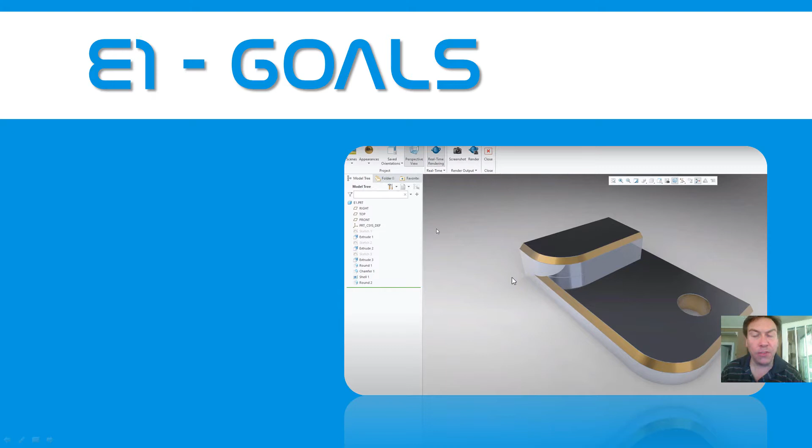Now it's like a plastic enclosure. It's actually hollowed out. You can't really see it from the angle that that's at, but you can also see it's in the interface of Creo. And this is what they call a photorealistic rendering. So it actually has some enhancement digitally to it.

All right, first of all, we're going to talk about the interface once we get into Creo. And the interface, again, that's like what you see here. This is the model tree, and then this is the ribbon up at the top, things like that. Then we're going to talk about settings. Now, settings, there's actually a couple areas in Creo where you can set things up, like what color do you want items to be? What units do you want? Do you want metric? Do you want English, or imperial, as it's sometimes known?

Then we're going to take a look at sketching. So the way you start modeling a part is you actually draw a two-dimensional profile of it, like you see here. And you can see it's a rectangle, and then you put in the dimensions. There you can see the width, and then you can see the height. And we'll even talk about this. Notice that little parentheses and weak. Remember that, because we're going to talk about what that is and what that does.

But we will sketch this in two-dimensional space, and then we get into 3D modeling from that profile. We can extrude it out and actually see there it's making a 3D model. You see the little pink arrow there in the middle, and then we can specify right there. You see it's set to 0.5, so that would be a ½ inch. So that's the goal for that.

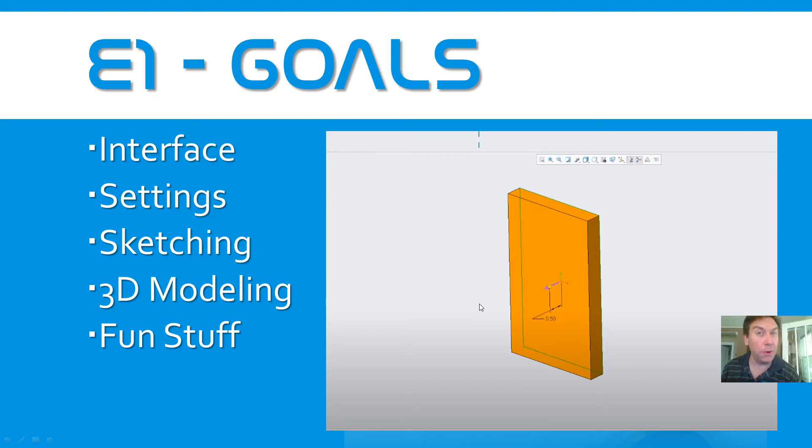Now we're going to have a little fun with this. Typically in the training guide, and I'll show you where that's all at in just a moment. Those of you in D2L have access to it. Those of you who might not have access to D2L at the present time, I'll actually show you where you could get it on the web as well. So we'll do some fun stuff. We're going to do that photorealistic rendering where we actually make it look really sharp. Okay, and I hope you find that interesting.

And then there's 2 labs. Now with every exercise, there's labs that go with it. Sometimes there's 2, sometimes there's 1. And usually it's how long is it going to take you. So if they're easy ones, I'll usually give you 2. If it's a very difficult lab, I give you 1, and those you typically want to do on your own.

Now be aware that this first exercise, I actually show you how to do it, but when you do the labs, those are what you're supposed to be doing on your own. You're going to be a much better designer using the software if you do those on your own and try them. And then you could go back and watch the video. You can pause the video once we're done with exercise 1, model these 2 things up, they're in the training guide, and then see how I did it. And you're going to learn so much. Before you know it, you'll be exceptional at this software.

And that's the goal. All right, and so these are what the labs look like. This is lab 1 and lab 1B. So when it comes to the nomenclature, exercise 1 is always going to be known as E1.

And then the labs that coincide with whatever exercise it is, exercises are kind of like the chapter, you might say, will carry the, like, instead of E1, it'll be L1 for lab 1. Or L1B for lab 1B. And so when we get to exercise 2, you'll have lab 2, and exercise 3 will have lab 3 as well. And I don't give you videos for all of the labs, be aware, because that's what you're supposed to be practicing on your own. And so that's going to make you a better designer.

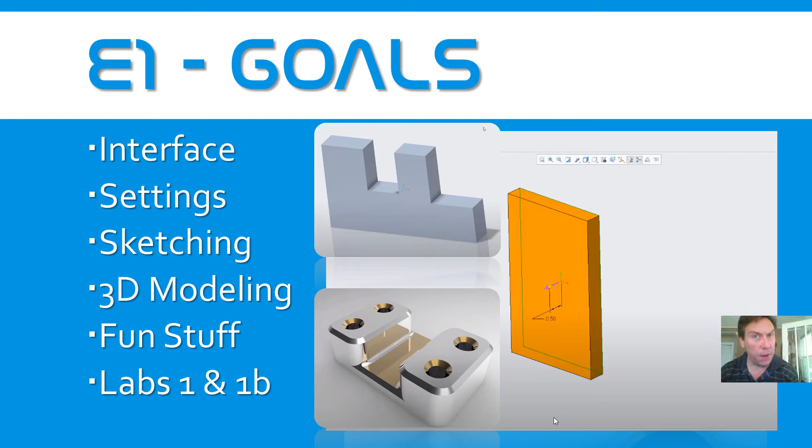And ultimately, this is what our goal today is, to finish these 3 models. And so every week, if you're in a 16-week course of this, you're going to have to model these up. And again, I give you the videos typically, especially if we're doing it online. Those of you who are in my class will actually do the exercise together, and the labs, you need to do those on your own.

Okay, so let's begin. I started up Creo earlier. There's a little video, especially in D2L, on how you could download the software. Even if you're not in my class, if you're just watching this on YouTube, you could just Google Creo Student. It depends on where you're going to school. Sometimes they have a licensing agreement. I don't know exactly whether your school will let you download it or not. But where I teach, all my students have access to it. Just make sure you use your student email address when you register, and you have to make a password.

Okay, so here we can see the interface, and that was the first thing we said we wanted to talk about. Now this is what we call the ribbon up at the top here, and the ribbon is a generic name. Those of you who might have taken a Microsoft Office class, they always call that the ribbon, the icons up at the top. Now on the left-hand side here, you have the model tree and folder browser and favorites. What we really focus on in this class is primarily the model tree, and that's going to contain a roadmap of everything you do when you model something up. And we'll see that in action.

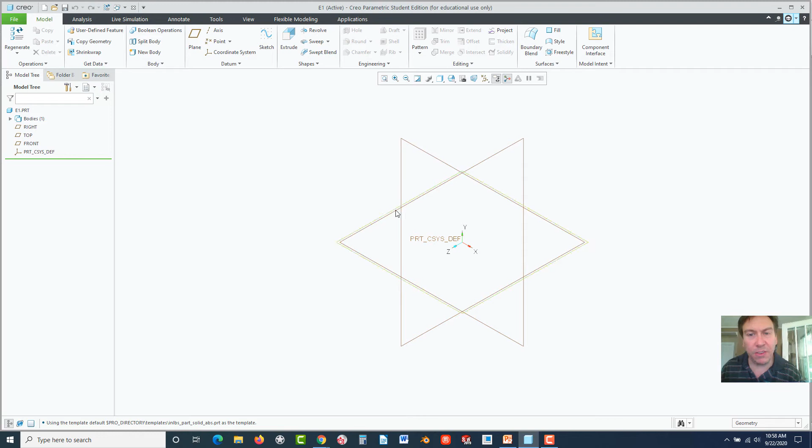But now we can see we have these, what they're called planes. And look over here in the model tree, you have right, top, and front. And as you click on them, they highlight in green. And those are your paper that you're going to sketch on. So when we're drawing that sketch of that rectangle, we select one of those views and we do it. And we have to just figure out, though, is that the front view we're drawing, the right view, or the top.

But as we go further into modeling over the course of the next few weeks, we'll focus more on that. But right now, I need you to focus just on sketching, and then later on you can give more thought, and we'll just have discussions about, like, should I draw this on the right, top, or front? I'll be honest, it really doesn't matter that much for the parts we're doing right now.

And in the industry, once you start using this and you have spatial awareness, it kind of starts to make sense. But the first day, it's a little much to talk about. So we're just going to go ahead and note for the next 4 weeks, we're going to sketch always on the front plane when we start off.

Okay, so what you do, you click on that front plane. Now notice right below it, there is a CSYS. That's a coordinate system. That's the actual world coordinate. That's the 0, 0, 0 for X, Y, and Z. Now, do you have to really know and understand X, Y, and Z? No, that's the beauty about this software.

It's a granddaddy of softwares when it comes to computer-aided design. And most of the companies have mimicked this technique. Creo was like the grandfather of this. And X, Y, and Z Cartesian coordinate modeling, which was the early 80s, was very much more difficult than what we're doing here. This whole concept of using planes to sketch on and then extruding is, in my opinion, very easy. It's understandable. So anyhow, all three of those planes intersect each other at that origin.

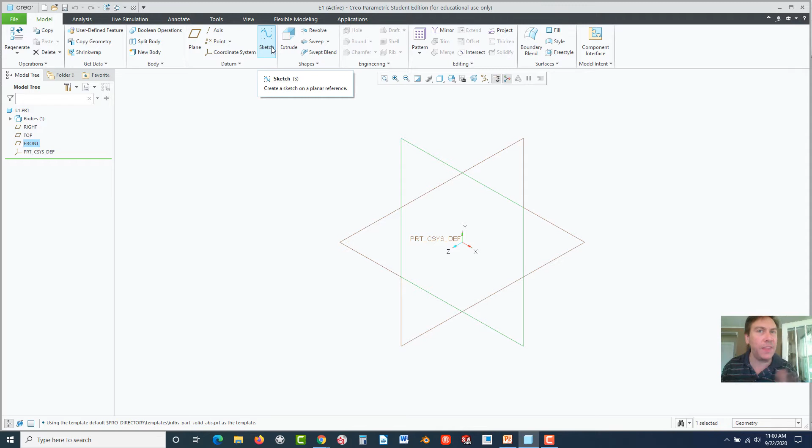We're going to start off using a method which I think is probably easiest for most people to understand. And that's starting a sketch on the plane versus going to a feature initially. As you get better at it though, picking a feature first might be a more plausible option, even more efficient option. And we'll have a discussion about that later, not today. But let's go with Sketch.

Now, once we select Sketch, you'll see your plane orients itself automatically. And that was that checkbox I said. It was one of my favorite checkboxes where it automatically orients the plane parallel to your screen. So we're sketching here, and these are the planes. Now, those aren't boundaries, by the way. It's infinite. However big you make this, you can make it that way.

So what we're going to do is go to the rectangle tool. Find rectangle up here and click. Now move your pointer over the origin, which is CSYS there. You'll get a little blue dot. When you get that blue dot, click. Now drag to the upper right. Now try and stay away.

Look at this. If I don't click yet, if I get that little equal symbol, stay away from those. They're great sometimes, and in this case, if it's not going to be equally square, it's not good for us. I mean, they're easy. You could just click on them and delete them if you accidentally get them. But they're automatic relations that are established, and we just want to avoid that. So click to the upper right, make a small little box like that.

Now here's the thing with Creo. When it comes to your mouse buttons, the left mouse button is what we're going to use 90% of the time. That's what I'm using to sketch with, and I'll always just refer to it as click because that's what we use all the time.

All right, so that's the left. When I made that, I just click, left mouse button. I'll very rarely say left mouse button after today's class, by the way. But the right mouse button allows you to select, and menus will pop up.

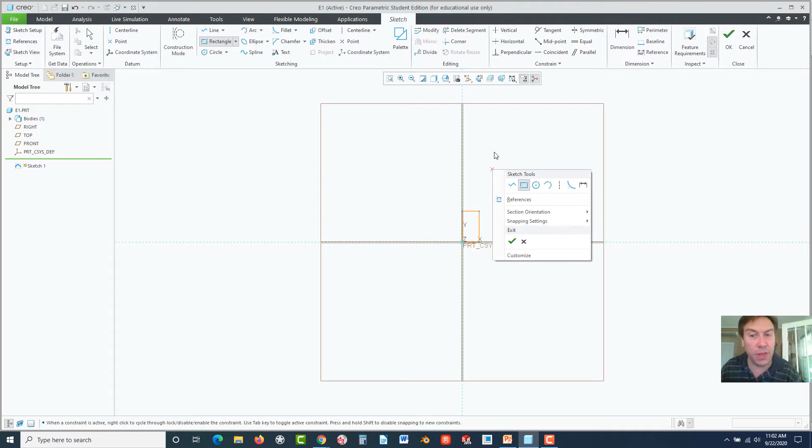Now, when you right click with Creo, it's interesting—it's a little different than some Windows programs where you automatically get the pull-down menu instantly. Creo sometimes isn't instantaneous; you have to hold it down for about a second, a little over. Just be aware it takes a minute if you ever do that. But I'm going to hit escape, and escape gets me out of that tool.

Now, if you really want the dimensions to appear once you've drawn something, believe it or not, that middle wheel will zoom in and out. If you scroll, that's easy, but believe it or not, it's actually a button too. Not everyone knows that. If you push it down and hold it like a button, it'll do certain things. What it does in Creo, it actually acts as an escape key sometimes. So go ahead and watch this on that mouse button.

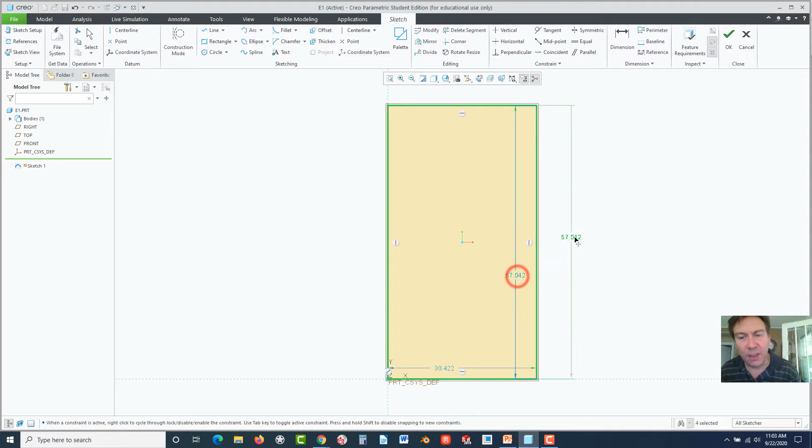Click, and look at what it just did. Now you could go up here to zoom to fit refit, and it'll zoom up for us. Now we can actually see—if you middle click again, you can grab these dimensions and drag them out. Now we have a rectangle, but as you can see, it's very large.

The actual dimensions that we want are located in the book. And those of you taking my class, there's a video before this that shows you how to utilize this. If you missed it, now is the time to watch and pay attention.

So I'm going to middle click on Chrome here, and I want you to type in vertanux1. Now, if you have D2L, you could get all this from D2L—you don't need to do this. But if you're not on D2L, go to this web page for vertanux1.

I made this page for my students as an alternative to D2L so they can access things. And also—

So for example, if you go to instructional manuals here and you're in Creo Parametric, now it says 6.0—that's because I haven't updated the manual yet. There's not a huge amount of changes I need to make, but I'll get it up there eventually. You'll see Creo Parametric 7.0 soon, but 7.0 just came out literally like a week ago, so I haven't had a chance to update my training guide.

But if you click on that, you can see the training guide for the course. It's in PDF, and here it is. You can see this is 6.0.

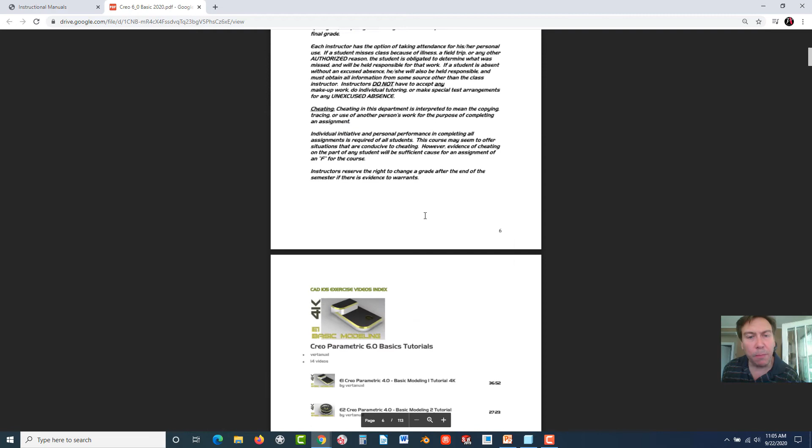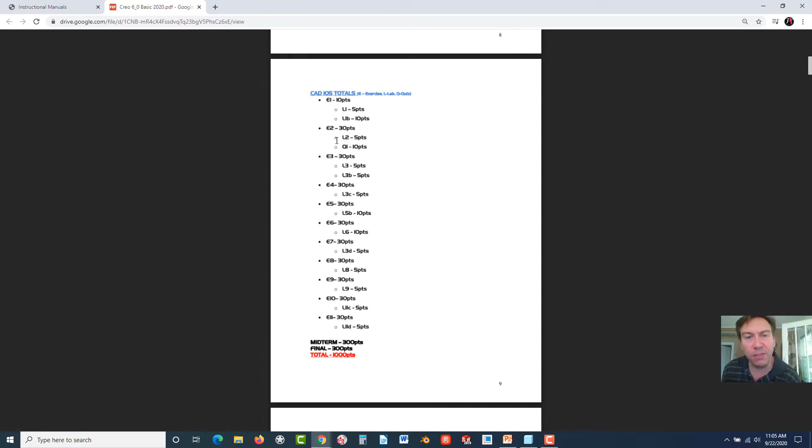All right, but this has everything you need, and even the point totals—look at that, there's E1, L1, L1B. E1 today is worth 10 points, L1 is 5 points, L1B is 10 points, and so on and so forth. So you could understand immediately where you are and what you need.

And again, the grade book on D2L has those all on there, so you could always check your grades once you send me those exercises in the labs. And remember, always send them to me as PDF.

Okay, so here we have the interface—we're just discussing this, so really this is just a rehash of what I'm going over. We talked about the interface: the origin, the model tree, the viewport, and the mouse buttons, which we just discussed.

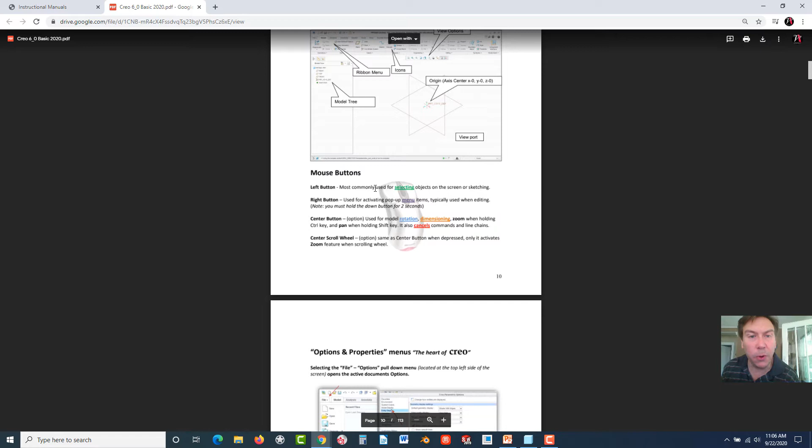There it is. Now the options menus, talks about that too. A little bit out of order I went, but that's okay. This is all here. It tells you how to start a sketch and talks a little bit about more details, some other things that we're going to talk about as we go through.

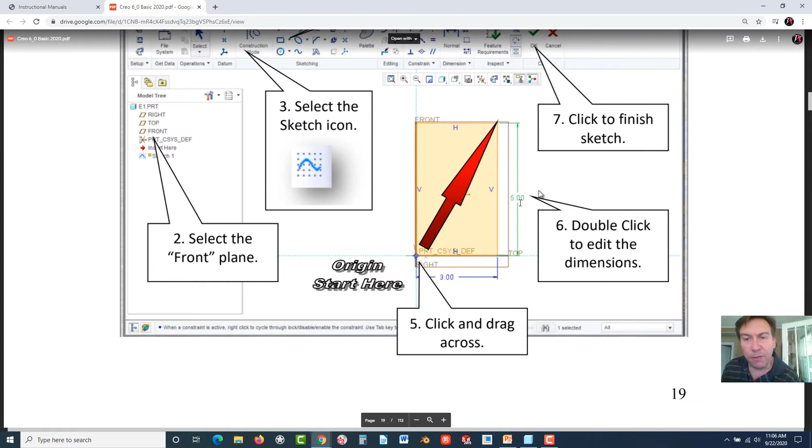But you finally get to exercise 1, and here it is. This is where you can see the actual parameters that you have to use. So if I zoom up here, you can see we're going to go ahead, and we've just gone through this whole series of steps, but 5 by 3 is what we're going to do.

Now I'm not going to use the guide to it because I have it in memory. I wrote this guide, so I don't need to use it all the time, but this will help you. If you'd like, print it out. It's free to print out, free for anyone to print out. So let's go back here. That's where I'm getting those dimensions and parameters from, or you could just watch this video, of course.

So double click on this dimension down here. Now there are 2 forms of constraints inside Creo. One is dimensional constraints. So like we want this to be 3 inches wide. Now notice that when I double click, there's up to 12 decimal places to deal with there.

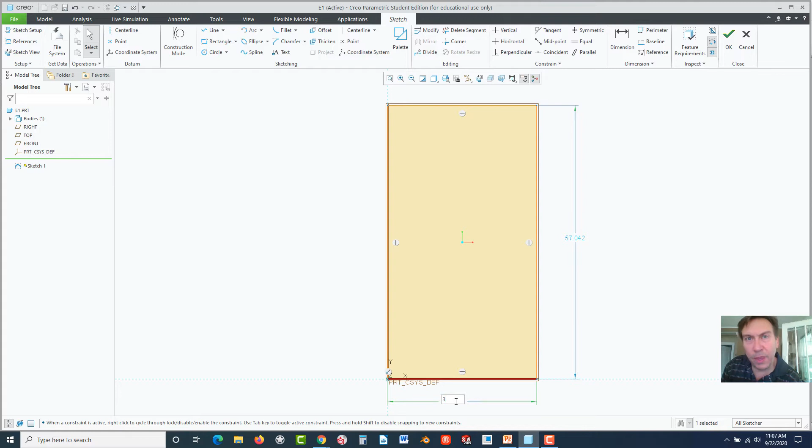Now, if you want to look professional, don't backspace on it or type in 3.0000 whatever. Just type 3 and hit enter. Because it was 3.0, it will know to fill in the zeros. And you can see right there, now it shrunk down a little bit.

Now let's get this one. Double click on this dimension. Type in 5. Hit enter. And now you could hit refit right up here. Now, next week I'm going to show you how to make a fast key for refit, like where you could just hit R and it will automatically do that.

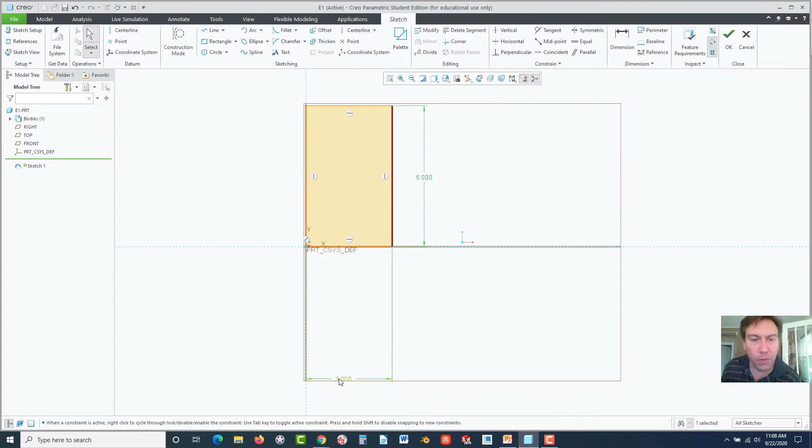But I don't want to go into that. That's a little bit more detailed today than I want to go into. But just note, reason to watch exercise 2 because I'll go through that with you. All right, I'm going to squeeze these in a little bit. I could hit refit again. So now we have these dimensions, and I'll tell you what, we can actually hide those planes.

You don't want to delete them, but click on the planes here, or this button right up here, and turn off select all. And it's going to clean up the screen a little bit. One reason I want to clean it up is so I can discuss these little things.

So this is the second layer of constraints that you have. Constraints can be automatically added or manually added. Like when we drew that out, that rectangle tool automatically added horizontal, vertical, horizontal, and vertical, and coincident, it locked into the origin. That's our anchor point. It's always good, my recommendation is to always lock in your geometry into the origin.

That's another reason why that 0, 0, 0 marker in space is there. It's an anchor point. If you just float it out, it still works. You can still do it, but just be aware that can be a little confusing.

All right, now if you didn't want this horizontal constraint, you just click on it and hit delete on your keyboard. Now, notice it puts a dimension, and watch what I could do from here. I could drag that down. So it removed the horizontal constraint. So be aware, if you add those, you could remove them.

Now you could re-add them, or you could hit undo. So there's an undo button up here. Now just remember, I have students panic and they hit undo several times. And there is a redo button right next to it, but sometimes I've seen where they've gone too far and it doesn't redo enough.

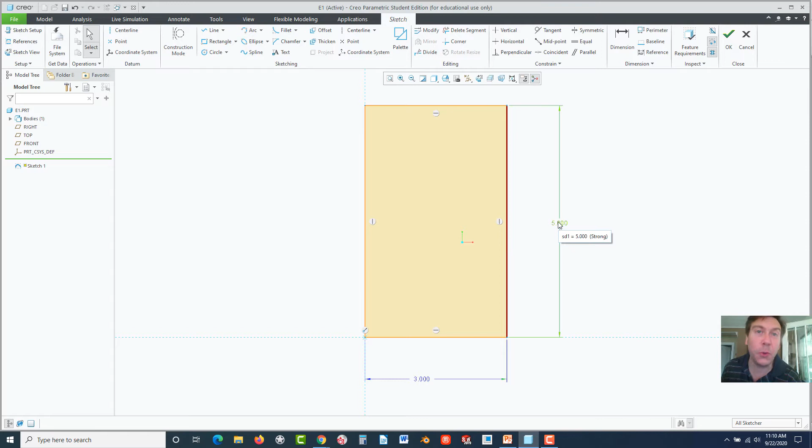Notice that dimension disappeared too. Weak dimensions disappear, but strong dimensions, like when we double clicked on this one, remain. Let me middle click twice to get out of that. Now as I hover over this, you can see in parentheses it says strong. So whenever you change a dimension, it strengthens it, and it won't automatically be deleted if you add another constraint. In fact, there will be a conflict because those are both strong entities. We'll discuss that another time.

But now that we have this, let's go ahead and hit OK. Before you 3D model it, you have to hit OK. Now we could go to extrude.

Now, you might not see it, like, okay, it just shaded it. But here's where I'm going to teach you how to rotate. That wheel does a lot of different things, and you could see in the training guide it had a whole list of things it does. You could go back and read that if you like.

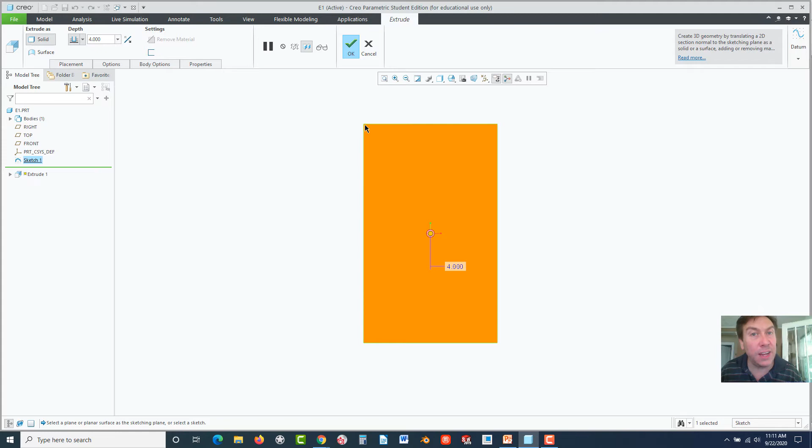If you push it down, actually let's first scroll it. Scroll in and out. Oh, there we go, and it's zoom. Notice when you're using that zoom, you could scroll in and out on certain areas. Like, get your pointer in this upper left corner and use the scroll to zoom up to that region by keeping your pointer focused on that area. Now go ahead and hit refit again.

Now, to rotate, hold that middle wheel down like it's a button. Push it, now hold, don't let it go. Move your mouse left, right, up and down. That's dynamic rotation. Play with it for a while. If you want, go ahead and pause the video and give that a try, because it's so important to be able to articulate or rotate and look at the models that you're working on. Give it a couple minutes. I usually say in class, hey guys, tinker with it a little bit. Okay, so anyhow, you can see that.

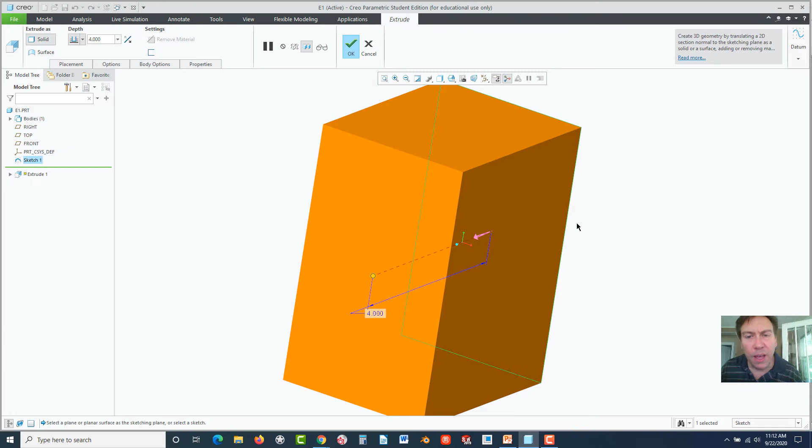Now here is our extrusion. So we have the ability to grab that little point there and drag it back. Now this little arrow, go ahead and click on it. It flips it backwards or forward. We want it forward towards us, so just leave it like that. And we actually want to double click in here and type in a value. You can type in 0.5.

Now notice I'm not using the ribbon up here. Why not? Well, I just didn't feel like it. You could go over here and make sure it's always solid. Not until the advanced class will we ever do a surface. If you ever get a surface, that's an indicator that you have a sloppy sketch. You might have a gap between the lines or something, and so it can't create a watertight boundary condition, so it couldn't extrude it. So just be aware of that.

But anyhow, you can see right here I could have typed in 0.5 as well, and it does it. Now here's the flip switch, just like that pink one, which will flip it to forward or backwards. Notice that you have a remove material option, but it's grayed out. That's what they call the object action paradigm, and it grays out things that you're not capable of doing. The reason is because to remove material, you'd have to have a solid volume to remove from, which we don't have because it's our first feature.

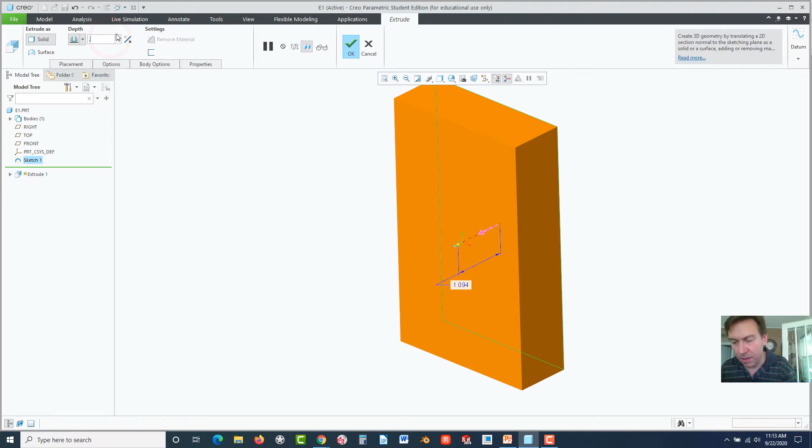All right, let's go ahead and make sure it's 0.5. Hit enter and hit the green check. You could hit refit, but also take a look over here. You have display style, hit that little arrow.

You have shaded with reflections. Now, if you don't get this, it might be because you don't have a professional graphics card, so don't feel bad if you don't have that. Go to shading with edges, click off of it, and you can see the edges there. You could go to shading, no hidden lines, so it's like a wireframe type of deal. That and all these are going to benefit you sometime or another.

But let's go back with shading with edges, that's my favorite. All right, now there's also this one right here, saved orientations. Hit that, you'll see you could go to front, back, top.

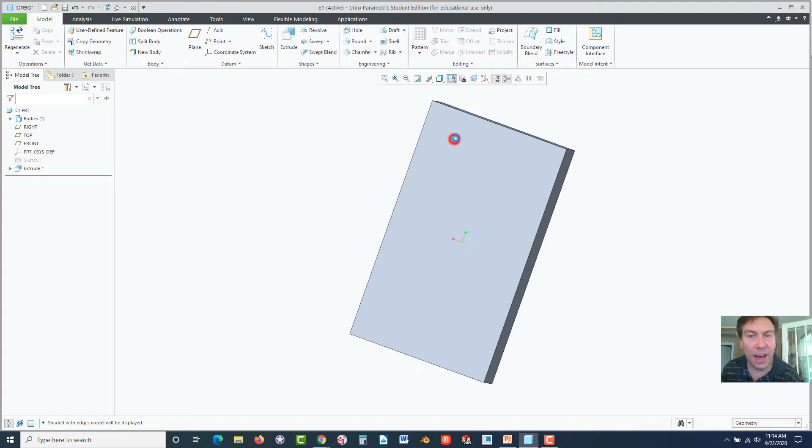Go to standard, and remember we set our standard up as isometric in the options menu. There were other options in there as well, like trimetric, and I think there's even dimetric, and you can make customized ones too. There's also perspective, which gives you a vanishing point.

We'll use perspective later when we want to make a photorealistic rendering to make it look realistic. Turn that off though, since it's difficult to work in that mode for some people, so I'd leave it off. There's also refresh screen, which we don't need right now, and rendering options like this. Leave those off too.

Then there's zoom in and zoom out. If you click on that, you can click and drag a fence around an area, click again, and it zooms up to that region. Same with that one. So you can see there's a number of options, but we're not going to go through them all right now. Here's our first solid model.

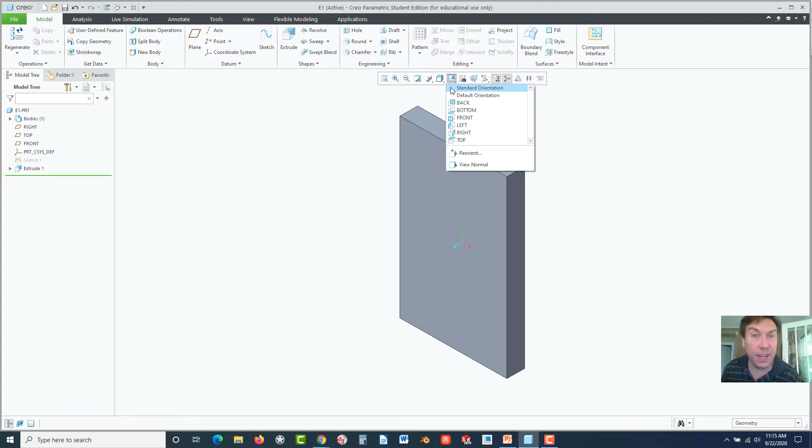Make sure you're in isometric. Again, standard orientation up here will bring you that. Default orientation is the same right now, though you could set them differently if you want. I'm not going to do that right now.

Now let's select this face. Remember we sketched on the front plane last time. Now we're going to build a block at the bottom using another corner rectangle, and we'll extrude it out a half inch. It's only going to be 1.5 inches high off the base edge, and it's going to lock into the left and right edges of the model. So let's do that. Go to Sketch.

Now can we go up here? Absolutely, select it, either one is fine. Find rectangle. If you hit the little arrow to the right of rectangle, there's corner rectangle, slanted, center rectangle, and parallelogram. Center rectangle is a little hint for the last lab today's video, I'll show you how to use that. We usually don't cover it until next week, but it's a really nice tool. We're going to go with corner rectangle for now.

Now move your pointer to the lower left corner and let it snap in there. When you get the blue dot, click and drag this to the right. When you hover over the right edge, it highlights green in my case, and you can actually see a midpoint there. Don't click on the midpoint, just hover over it and you'll see it snap to it. We don't want it at the midpoint today, but in Lab 1B you may use that.

When you get on this edge, just click and then middle click. Remember, you middle click the wheel, and that brings up the dimension. Actually, middle click two times and it gets you out of whatever tool, kind of like hitting escape. You can hit escape on your keyboard too, but I really like that middle wheel.

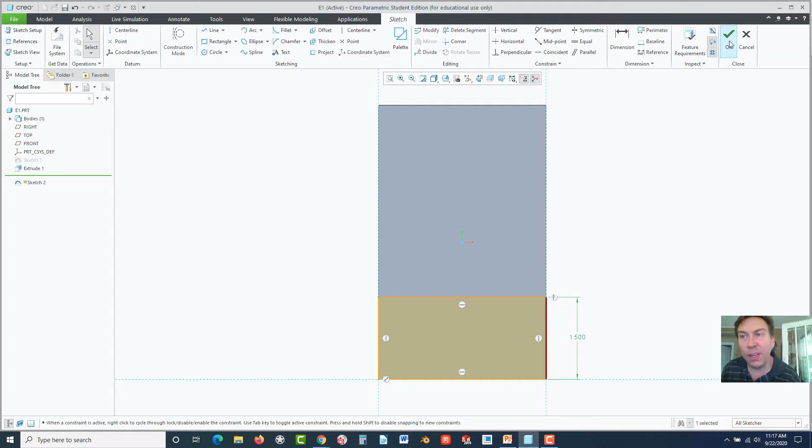Now we could go to OK, go to extrude, and rotate this so you can see it. Remember rotate, which button? The wheel. You hold it down and then move your mouse left or right. Okay, so we've done that. Or remember, you could also go up here and go to standard orientation.

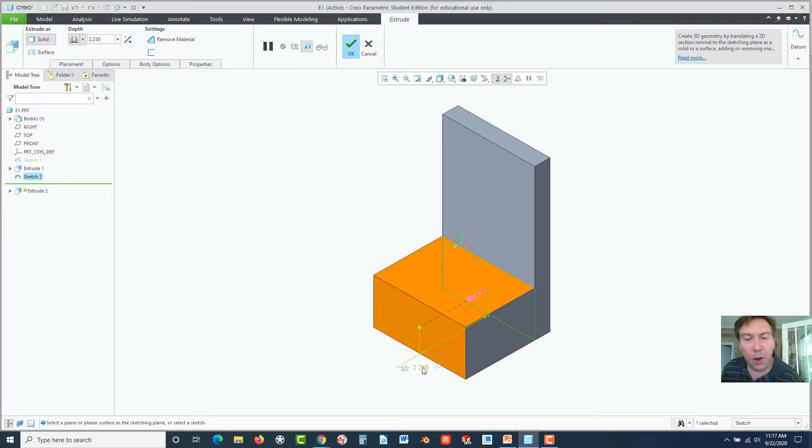This one we said we were going to make 0.5. So you could double click in here, type in 0.5, hit enter. You could hit enter again or hit OK, either one. Now it merged the two bodies.

Now we're going to learn how to put a hole in it. Creo has a wonderful hole wizard, as I call it, with counterbores, countersinks, and things like that. We're just going to learn how to do a hole that we draw in with a profile and cut it through for today. We'll use the hole wizard for exercise 4, so it won't be for a while.

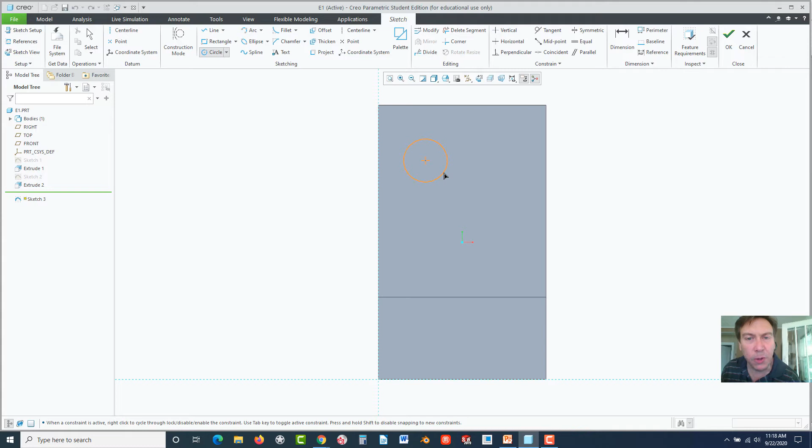But select this face and go to Sketch. Now go to circle. If you hit the little arrow next to circle, you'll see there's center and point, concentric, 3 point, and 3 tangent. We're just going to use center and point. Now in this upper left quadrant, click and drag out a circle, just like I have. Take careful note what I'm doing. Click, and then middle click two times. Remember the middle wheel?

Okay, now you'll see some dimensions. Let's drag them out here and move them into a position where we could easily read them. Now they're all weak dimensions. Okay, now this one should be 0.75. So let's double click on that, 0.75. Now this one, we want that one. Double click on that. That's going to be 1 inch. So it's 1 inch off of the left edge.

Now this one, we actually want it 1 inch off the top edge, not off the bottom. So you don't have to follow what they give you. That's a weak dimension. We'll override it with our own dimension. So go ahead and select the dimension tool here. It's our first time using the dimension tool. Now, select the top edge that we want to reference from one time. Select the center point, not the outer edge, the center point. See that little cross in the center here of the circle. Move your pointer over here.

Now, this is the funny one because no other CAD system I've ever seen does it this way. Now, remember, Creo is a granddaddy of 3D CAD software. So they do things differently because no one had a way of doing these things back then. They had to be creative and think of ways to do it. Most of you from other CAD systems, if you've used them, would know that you would just click, which in this class means left.

If you try that right here, because you want to drop it there, nothing happens. And you'll say, wow, that's weird, because almost every CAD system out there does it with the left mouse button. Not Creo. Remember, Creo is the granddaddy. There were no rules when they wrote this. Instead, it's the middle wheel, the middle button. You just have to click once. But hover where you want it, like right here, middle click, and type in 1.

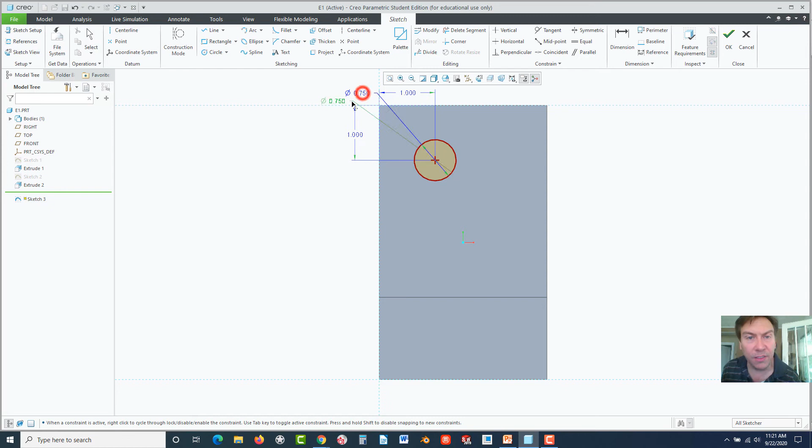See, look at that. I try not to have anything overlapping, and they're laid out in such a way that someone could read it easily. And that's the goal of a drawing. Okay, let's go ahead and hit OK. All right, now go to extrude. Rotate with your wheel again. Remember the middle wheel, hold it down, and you can see it's extruding. Now, we want to flip that. Hit that little arrow so it flips it in.

Now, look at that, the object action paradigm. Now, believe it or not, that's what they used to call it in the 90s. And it was a technology NASA developed. And it's kind of a predecessor to what we now call AI. Does anyone know what AI stands for? Artificial intelligence. Remember how remove material wasn't available before? Now it is, because we have a volume to subtract from. And so it doesn't let you pick things that you can't use.

So it's just like having a little robot next to you with your toolbox. And if you're grabbing a hammer to put in a screw, it's not going to give you a hammer because it knows you can't use it, or you shouldn't use a hammer to put a screw in. It's going to give you a screwdriver. And so that's what Creo is doing right here. So it's kind of a form of AI or expert system.

All right, so anyhow, remove material automatically selected. If not, sometimes it's not always smart enough. It depends upon how you model. I've seen it where it got confused and it's wrong. So sometimes you do still have to select it. Just be aware of that. It's not always perfect. AI is never perfect.

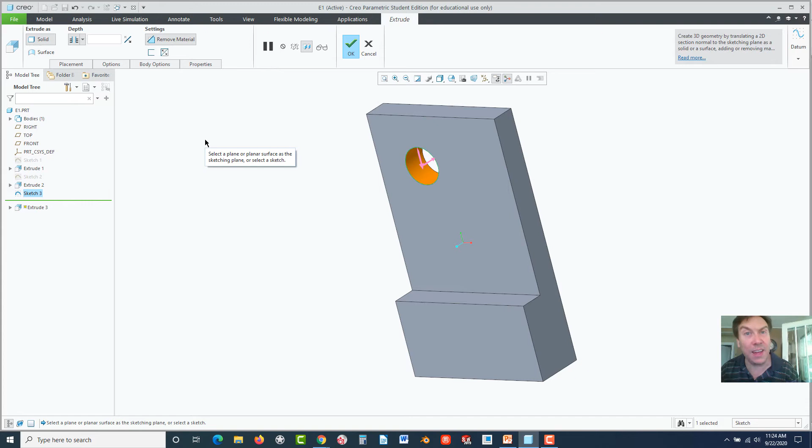So, instead of specifying a 0.5, where if it ever thickens, we have to go back and change the hole depth too, what if we thought of a way that we never have to change the hole depth? Look at this. Click on depth right there to the right, and find through all, which basically extrudes to intersect with all surfaces. See, the image even shows through all. Click on that. That will ensure that no matter what change comes down, that always goes through. So that's a taste of what they call design intent. All right, go ahead and hit OK.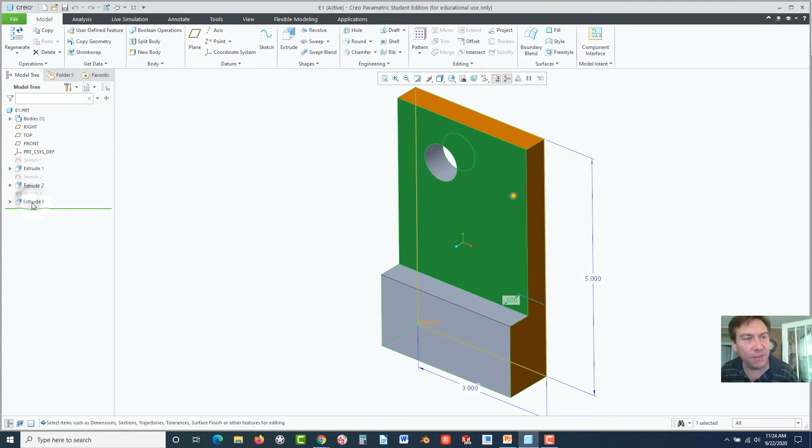Now, there we are. Now let's test that design intent. Double click on this surface and you'll see the dimensions appear. If that doesn't occur, you can also right click, and this gold ball with the pencil will edit the definition of the extrusion as well. But with these dimensions, this will basically take you back. And you can also right click on the feature over here and get the gold ball. If I click on it, it brings us back to where we were so we can make changes.

And that was what was so monumental about this software in 1987 when it came out. It had what's called parametrics, the ability to change. There were a lot of CAD systems in those days where you had to remodel things. Creo, which is originally known as Pro Engineer and still referred to as Pro Engineer, had the insight to be able to change. And that's what's so powerful. Now, most CAD systems these days have this functionality. Anyhow, so you could go back and change that. I'm going to hit cancel there.

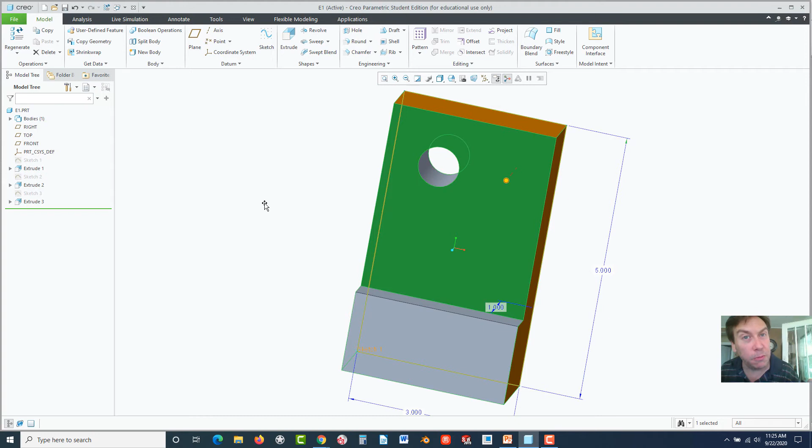But let's make our change here. Let's double click on this surface and you'll see right here, there's the 0.5 dimension. That's for the thickness. Double click. For the kicks, change it to 1. Hit enter. Now click off of it, middle click 2 times, and look, it still goes through. If we had set it to 0.5, not thinking about change later on down the road, we might have an issue there. We'd have to change the hole by double clicking on it and finding how deep that cuts. Nothing pops up here simply because we selected through all.

Okay. So now just hit regenerate up here. If you ever have artifacts left over from a change, just hit regenerate. Regenerate updates everything; anything that might not have been updated, updates. Now to get that back to 0.5 inch, you could just hit undo. Try it. Oh, didn't do it. Hit undo again. There we go. Don't go back too far. I've had students who've undone their whole part, and you do have redo, but don't count on it every time. All right, so that finishes this exercise.

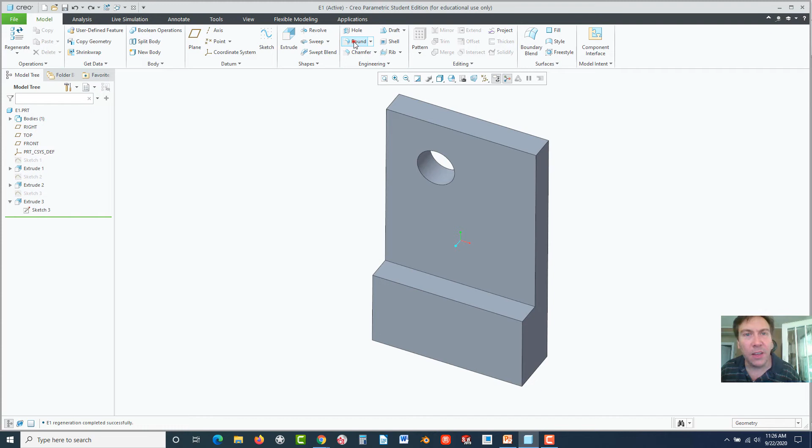But remember I said fun stuff. This is where I want to show you some neat stuff. Go to round and set this to 0.5. Now click on this edge and you'll see it rounds the edge. Now grab that little yellow dot, drag it down, try and get it to where that ruler says 1.00. It's a little hard. We could change it right here. Just type in 1, hit enter. Go ahead and select this one over here too. Hit enter, and hit the green check. All right, look at that.

That's rounding off corners. Don't go crazy and add over here, okay? Not yet. I do encourage you on the labs to have fun with it because that's where you're going to learn so much. Just add stuff to it. Add chamfers, fillets. Let's add a chamfer. See chamfer right here? A chamfer is an angle. Instead of a round, it's actually a straight edge. So you can see here we have distance times distance. And let's set it to 0.125.

So 1/8 of an inch. And I want you to select this edge. You might have to click twice on that edge. And you'll see it as what's called a chamfer. It's just a straight edge versus whatever. And in this case, if it's 90 degrees that you're putting it on and the distances are equal, it'll automatically make that angle at 45 degrees.

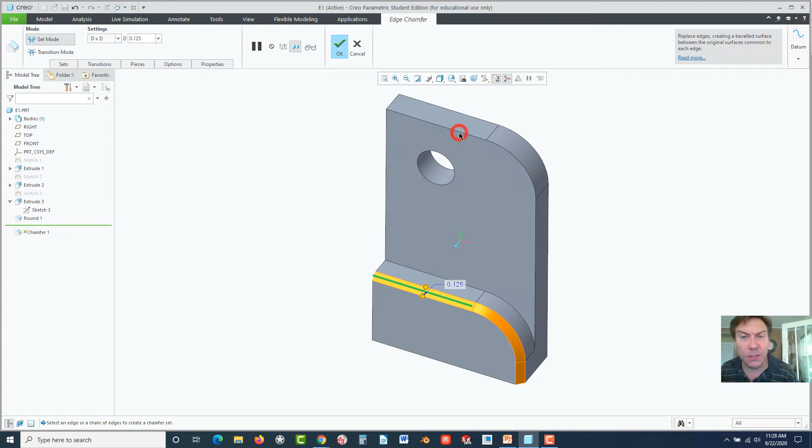But what if we wanted a different angle? Hit the little arrow and look at that. Angle times distance. You would actually be able to specify, like I want a 30-degree angle times 0.125 or whatever, and it gives you a variation of that. So there's a lot of neat things with that too. Have fun with that. Go ahead and select this edge. Hit OK. And then click somewhere over here. All right, so we're getting there.

Let's rotate this with your wheel to get this backside. Now, take a moment. I want you to learn how to rotate. I said take a moment earlier in this, and you can do that now too. Rotate it so it looks just like mine. Take a minute. Pause my video.

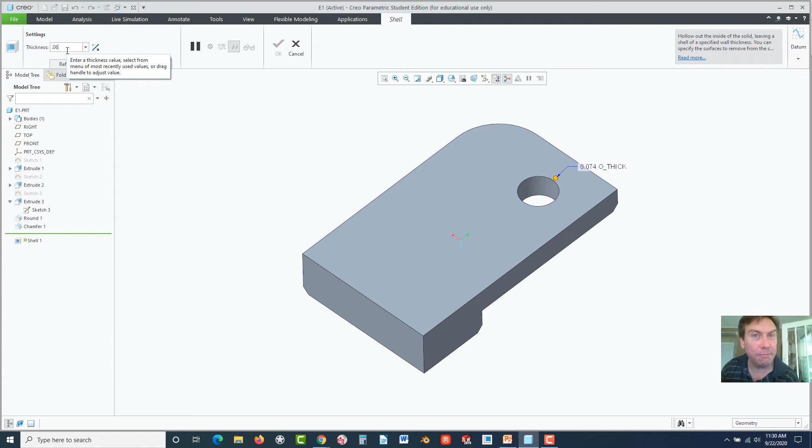All right, so that we have that. Let's go ahead and select this face right here. Click on it maybe a second time. And look at that, you can see it shelled out. Now, hold Control down. Sometimes I forget to tell you this in the videos, but when you're selecting multiple items, you have to hold Control. So hold Control, select the side face. Don't let go of Control, select this face. Now you could release Control. Once you have the item selected, you can do that. All right, let's go ahead and hit the green check.

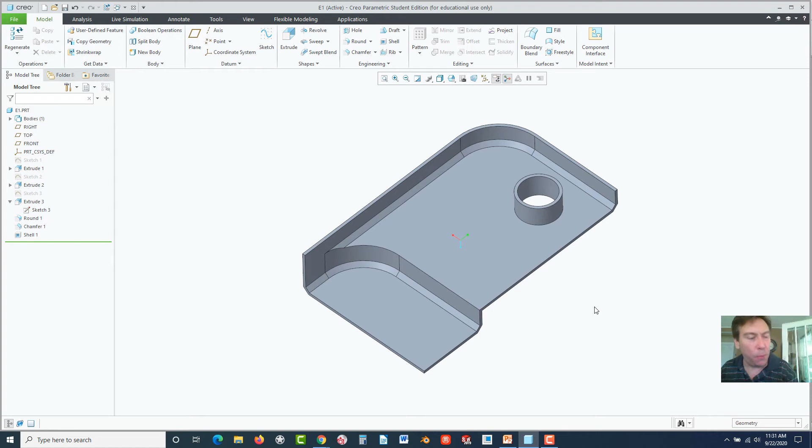Now we've taken a very basic part and we've made it extraordinary. Look, imagine making a portfolio like this. Now, exercise 0, if you type in E0 Creo, it'll take you to my video on how to make a portfolio. And so let's look at that right now.

So I was saying fun stuff. This is a little bit more fun stuff. So let's go to Applications, go to Render Studio. Now, if you don't have Render Studio, it depends. Those of you who are taking my class at ECC, we have this. So you should have Render Studio. Not everyone gets Render Studio. It depends on what school you're going to.

Okay, so Render Studio actually takes photorealistic renderings of whatever you're doing. So we have real-time rendering on, turn on perspective, and it slows down your computer. You can actually hear it through my laptop. It's actually roaring. The fan is going because it's utilizing 100% of that microprocessor, even all the cores. Anyhow, I'm going to turn off real time, and you hear it quiet down. Okay. All right, and it's going to move faster now.

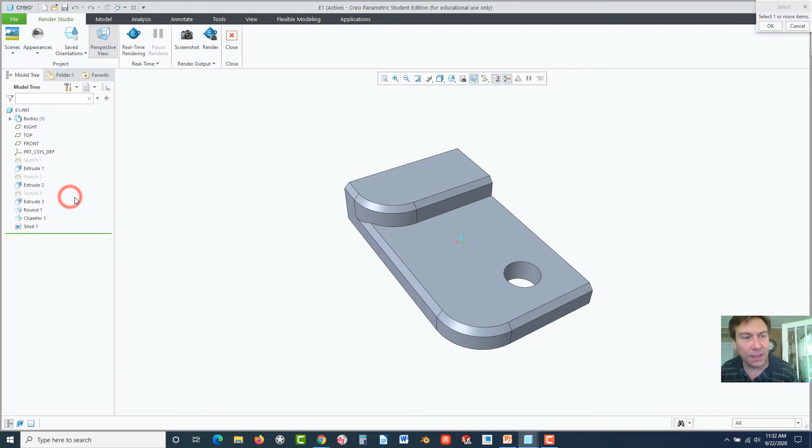Now go to Appearances, right over here, and pick something like, for example, this is one of my favorites, Chrome Plate. Now, before, you just select surfaces, that's if you want to select an individual surface. We want the whole thing to be Chrome. So over here is a filter. Click over here where it says All, and find Part. Select the part. See the little paintbrush? Click. And now middle click. Just like when you add a dimension, remember, you hold the wheel down and it will apply it.

Now, if you really want to see something neat, and again, you might have to have a professional card to see this, so if you don't see it, don't panic. Shading. Shading with reflections. And look at that. Now it's like really highlighted. Looks pretty slick.

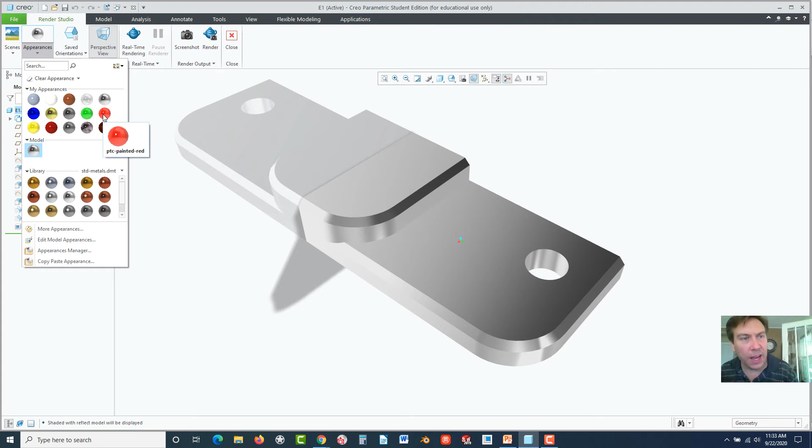Let's go to Appearances. And I'm going to go over here to Red. PTC Red. Now, this is where you could just select individual surfaces. Click on this surface here. Hold Control if you want to select additional surfaces. And I'm going to paint just the chamfers and the hole. Now I release Control and middle click again on the wheel. And you've just added some color.

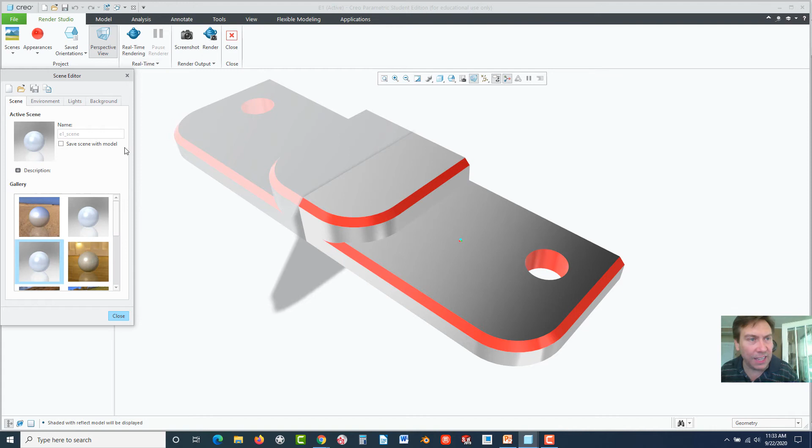Let's go over here to Scene. Now there's different scenes you can add here, but I'm going to go to Edit Scene. Now I want mine to be on a floor differently, like it's laying down. So go to Environment here and Floor Plane, and I believe we want Back. There we go, select Back. And you can hit Close, and now see the shadows are affected differently. And make sure that perspective view is turned on.

And now go ahead and hit Real-Time Render. And sit back and see how well it actually renders. It could be fast on some computers, slower on others. They have a phenomenal rendering package built into this software. And again, you might not have it, depending upon if you have the student license where you actually have classes and your college or university pays for this. You might not have all this functionality, so just be aware.

Okay, now if I wanted to make a portfolio for this, here's how to make a portfolio. Now there is a video for this, but I'm going to show you really quick. Now you could use LibreOffice. Notice I have LibreOffice right down here, or I have Microsoft Word. Either one is fine. LibreOffice is free. Microsoft Word, you might have to pay for it, but I'm going to use Microsoft Word. But before I do that, I'm going to hold Alt and Print Screen.

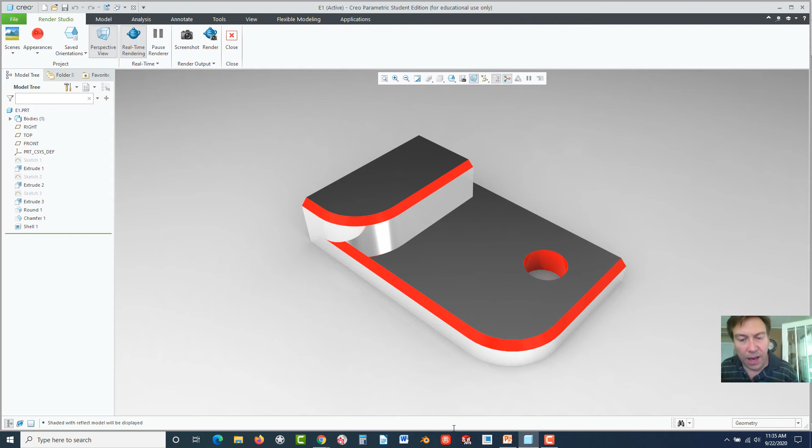Now I go to Word, start up Microsoft Word. I got an old version of Word, 2010, but up here I'm going to go ahead and type in capital E1, hit enter, and I'm going to call it the enclosure. Enter. You can put your name. If you want, put your date. But now, to get it into the document, hold Control and hit V as in Victor, and it will drop it in.

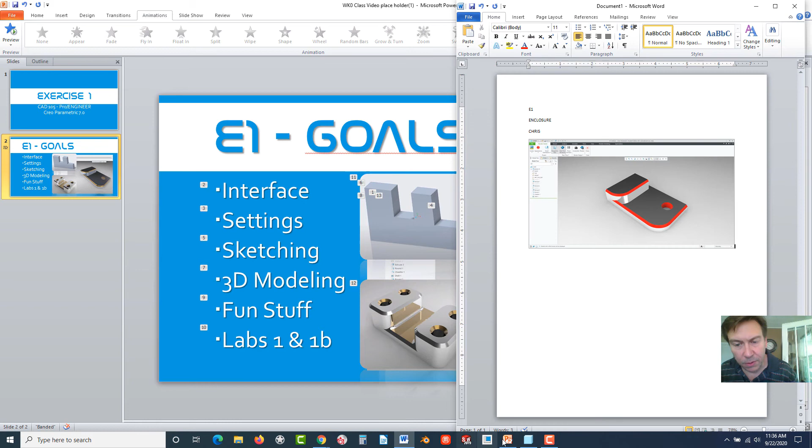Now, you'll see here, and you know what? So it runs faster, turn off real-time render, or also just keep running. Okay. There, now it could go back. Oh, not there. I wanted to go to the Word document. And let me go back to Creo. Got a lot of stuff going here. All right, so there we have the Word document.

Now, let's say we want to tidy that up a bit. You could leave it like that. This is impressive to an employer. Remember, the whole idea of a portfolio is to make an impression when you try and get a job doing this. Not many people know Creo, by the way. Creo, like I said, is like being in the special forces of CAD. It's tough. So make a great portfolio, and you could maybe find a really nice job doing this. All right, so if you go to Format, you'll go to Crop, and you can crop this down.

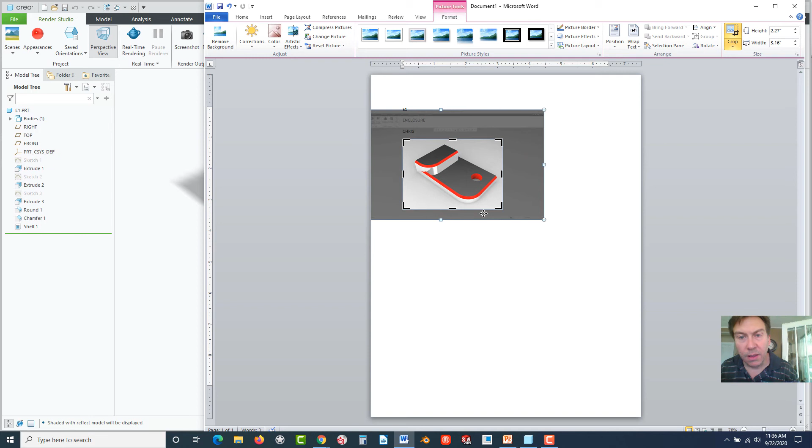Okay, get rid of the stuff around it, click and drag to make it a little bigger. Now hit to the lower right, hit Enter, and type Lab 1. Make a space for that, hit Enter a few times, then Lab 1B, because you're going to make your portfolio like this. Then you could save it and send it to me as is.

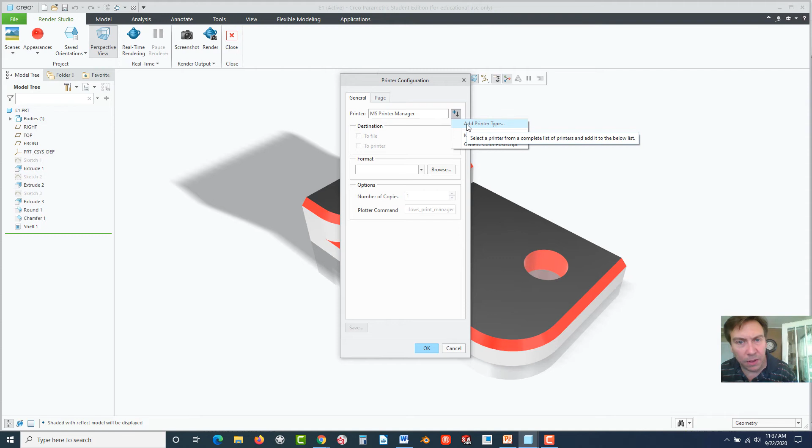Another thing you could do is go to File, then Print, and you'll see there's options instead of the MS Printer Manager. Hit Add Printer Type - I believe you could usually find... oh no, I'm not finding it. Hit Cancel. I was hoping to get a PDF there, and there's probably a way to do it, but let's see here - Quick Print. But you know what, just do it the way I was doing it.

Now here's the thing: if you want to save your model, remember it saves it in a temporary backup place, but I would go to Save As and save a backup. What the backup does is keep the name E1 because you want that name on it, and it just lets you direct where you'd like to put it. So if I wanted, I could put it on my desktop under my documents. I'll just go to desktop and hit OK, and boom, it's there. Okay, so now I've saved it. So just be aware, otherwise it saves it in this temporary directory unless you save it like that. So it's a good thing to do.

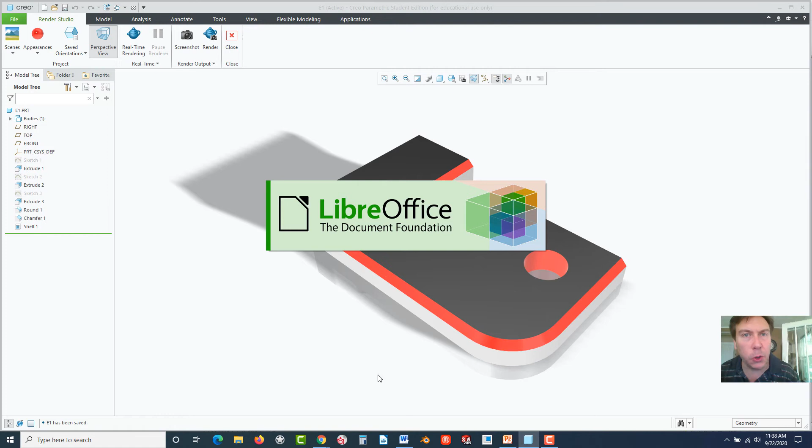Now, those of you with LibreOffice, if you don't have Microsoft Office, I'm going to show you really quick - it works the same way. You could Google it and just download it, it's free. This is LibreOffice Writer, by the way, one of the modules in it.

Here I just type in E1, and I'm actually going to put in enclosure - a little bit different than I did before. Hit Enter, you can put in anything else you want. Enter and Control V again, and it should paste that in there. Now when you click here, if you right click, they have crop. You can do the same thing we just saw where you could just crop down what you don't want to see, and then just move it and click off of it.

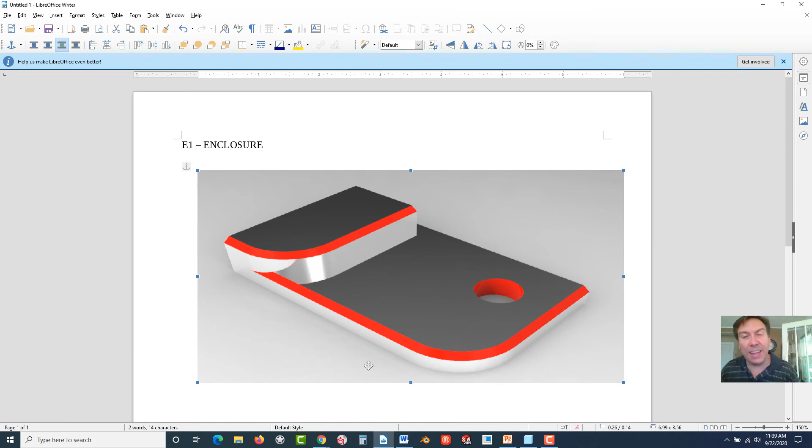And you can enlarge it by grabbing the corners. Never do this - this is a blunder I see people do where they stretch it out, and it looks very unprofessional if you do that. I've seen portfolios from students where they do that. Never grab the middle ones, always grab the corners, and it scales it properly. So that's going to make your portfolio look professional.

Okay, all right, so that's LibreOffice. You could use either one of those. And then just save it, send it to me when you're done with it.

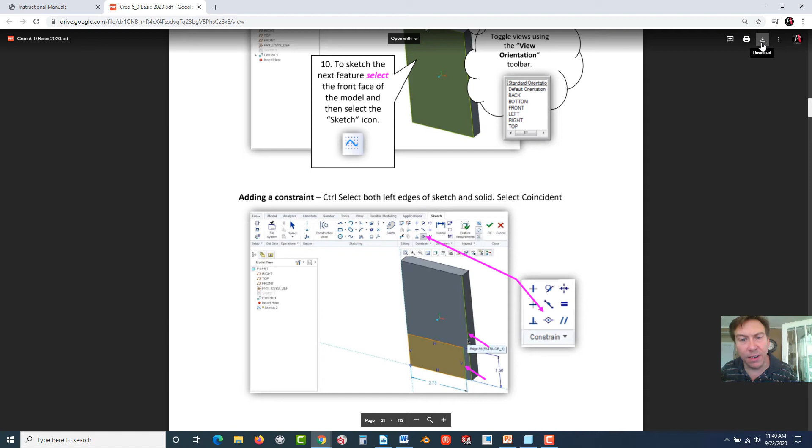Okay, now first of all, how do I rotate this? If you right click, you'll notice there's no rotate. But if you download the training guide right here, it should appear like in my Chrome - it's going to drop in here, there it is. I click on it, it'll open it up again. Now look at this, you have a rotate button.

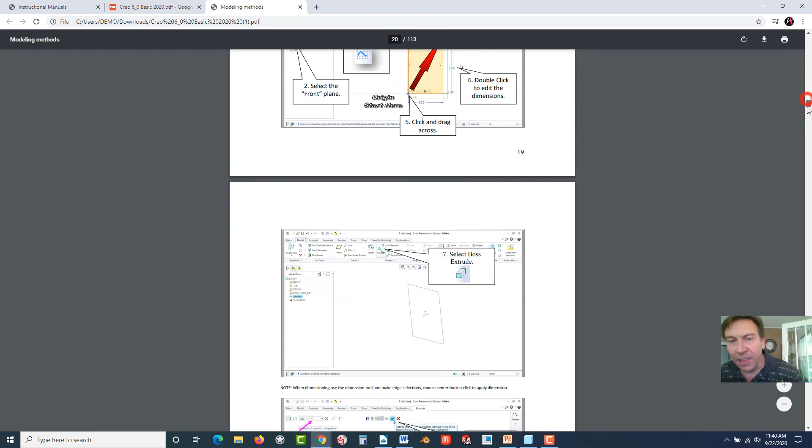So that's helpful when you're making the next two things. So where you're going to find the drawings for these are at the end of the exercise, whatever exercise you're on - you go to the very last page of it, there it is. And by the way, this is all you're responsible for in my classes, is making that model. But I encourage you to enhance it, because that portfolio is going to be like gold if you enhance those images. Okay, now here this is your first L1 list right there, and then this is Lab 1B.

Okay, so there's - and this looks like the letter F. Now to rotate, remember you could click on this a couple times, or 3 times, and it rotates, so you're not having to turn your head. I've seen students turn their head a lot, and it's like, oh no, just download it and rotate. Okay, so there is that. You can see it's a 2 by 3.5, and I'm going to make this really quick just to show you.

Remember, those of you doing this, I really encourage you to try these on your own. Pause, and then go back later. If you get stuck, watch my video. You're going to be a lot better designer.

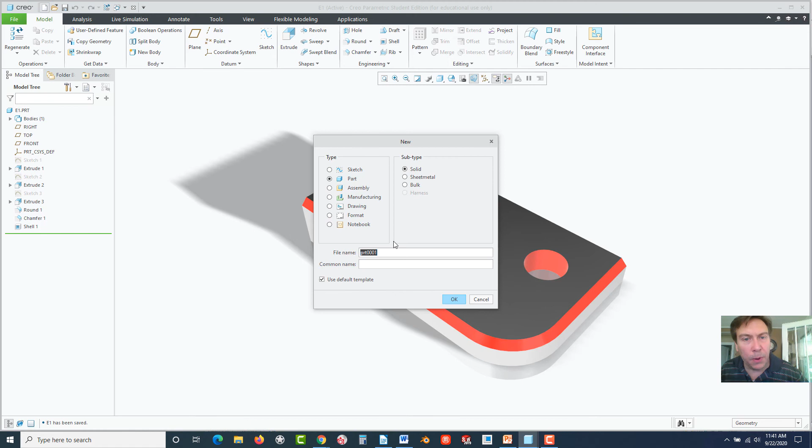Okay, so 2 by 3.5. Let's start a new part. This is L1, capital L1, hit OK. Remember, everything's on the front plane for the first 4 weeks here. So select the front plane, go to Sketch, go to the line tool.

Now we're going to do something different. Remember, we use rectangles and circles, we haven't really used the line yet. So line chain, go to the origin, your anchor point. Always a good idea to start there. Click, drag up a line, click, and middle click 2 times.

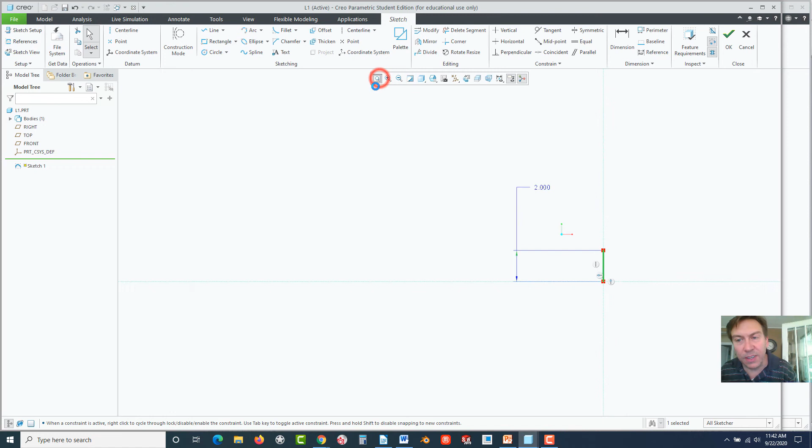The reason is we want to scale it down because this is a really tiny part. So now find that dimension, double click, set it to 2 and hit enter. Now hit fit, or refit there. Actually, I'm going to drag it in. Let's refit it again. All right, so now we have that, and you could use your wheel to fit it in. So we have that 2 inches, looking good there.

Let's go back to line. Right over here, click on that point, drag this out a little bit longer, click, drag this up like so, click, drag this across, stay away from the equal symbols. Look at that, see that equal symbol? It highlights the right edge. That's because it wants to make it equal to both. Equal is an excellent automatic relationship, and it can be turned off in those options that I showed you in the very beginning of the class.

But I kind of like it. It's very useful. So I leave it on.

So click here, drag this up, make sure you don't get an equal. I'm going to go ahead. Actually, I do want it to infer to that edge. See how it's dashed across it? That's an inference line. Click, drag this across, stay away from equals, click, drag this down, not quite as low as the last one.

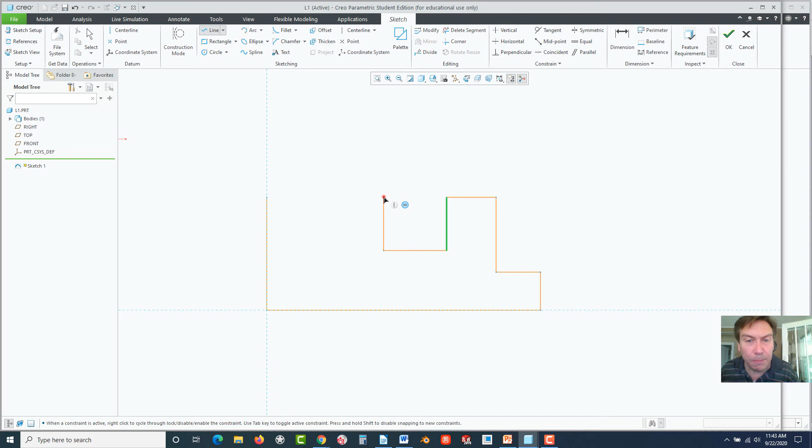Click, drag this over here, stay away from equal symbols, drag this up here. This one you can make it equal, actually. Click and drag this across to close it. Now middle click. Now we could have gone the other way. I'll be honest, the other way would have been easier.

Now let's change this. So we're going to go to dimension and add the first one right here. Click on the actual line. You don't have to click on both ends like I was showing you earlier. You can click on the line.

Now up here, hover. Does anyone remember which mouse button you have to select to drop the dimension in? If you pick the middle wheel, you're right, middle click. Okay, now let's go ahead and put our dimension in. That's going to be actually 1.75. Hit enter.

And let's go back to that drawing. I just want to make sure. Oh, it's actually 1 inch. I made a mistake, 1.75 is over here. Look at how this is what we call baseline dimension. The left edge is the baseline, and every subsequent dimension is based off of it. So we have 1, 1.75, 2.5. So double click, change it to 1.

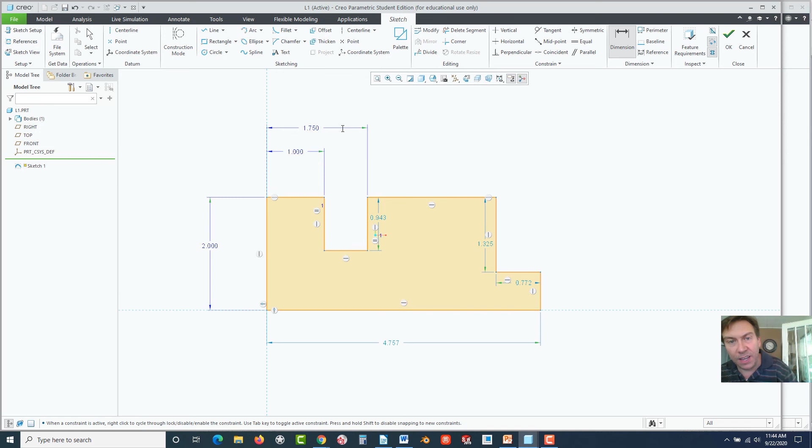Now let's click on this edge to this edge. Get it up here, and you stair step them so they climb over each other. 1.75, enter. Now the next one, click on this edge to this edge. Stair step them and make that 2.5. And if I'm correct there, I just want to double check. That's 2.5.

Now this one doesn't need to be added, 3.5. Well, it needs to be changed actually. I'm sorry. That's middle. Let's go down there. Now we could just double click on this. 3.5.

All right, now these dimensions, neither one we really want. So instead, if you look at the drawing, they're actually dimensioned this way. This one, click here, and then middle click over here. That's 0.85, I think. Let's just double check.

I have bad memory sometimes. 0.85. And then the next one is 1 inch. So it just steps over. So click here to this bottom edge and then click and then 1 inch.

Now, if you ever see these equal symbols interfering, like if you add something that interferes, you could delete those because sometimes you might accidentally add them. But in this case, we've got it working. Lay the dimensions out. Look at how I laid them out.

Take the time to lay them out. One reason why is that by the 6th week we'll learn these dimensions can be called up for your 2D drawing. Then you don't have to do a lot of work. You just retrieve those dimensions, and they propagate onto the drawing how you laid them out here. And if they're laid out in a legible, good format like you learned in 101, or else you'll learn in 101 if you haven't taken it yet, that's a good drawing.

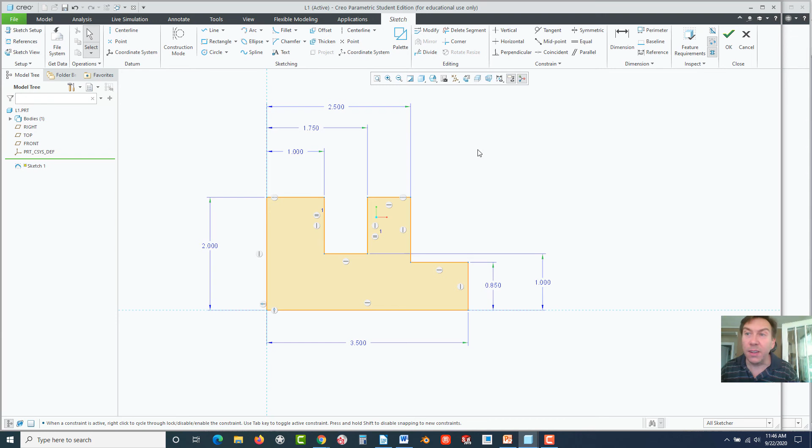Okay, hit OK. Now go to extrude, and it's only 0.5. I don't need to rotate it necessarily, I trust it. Hit OK. Now you can rotate, and look at that. It's beautiful.

Have a little fun with it, I encourage you. This is all you get 5 points for this one according to the training guide. If you remember, go back to the training guide, I believe it's page 8 or something. So you go here, there it is. So L1 is 5 points, L1B, the next one, is 10 points.

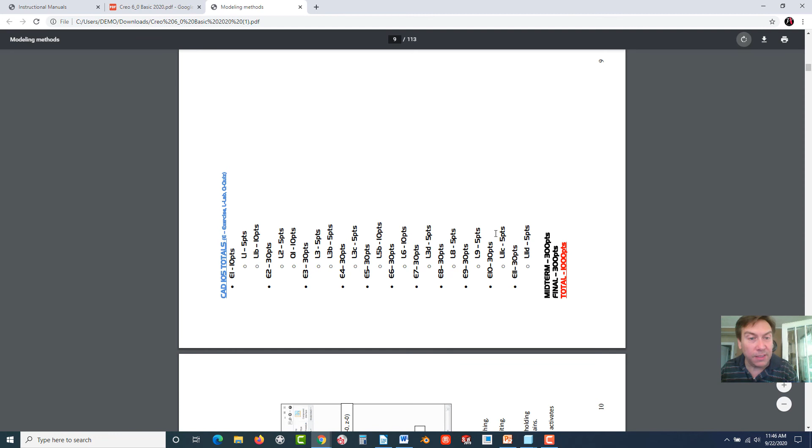All right, but feel free to use rounds, just add them and have fun. Go over here, add a couple rounds wherever you want, and we'll rotate at that bottom edge. Hit OK. Now you could try chamfer, have a little fun. 0.125, we could use that one again. See how they work, notice how they stop when they come to a sharp edge. If there's a fillet, they go all the way around.

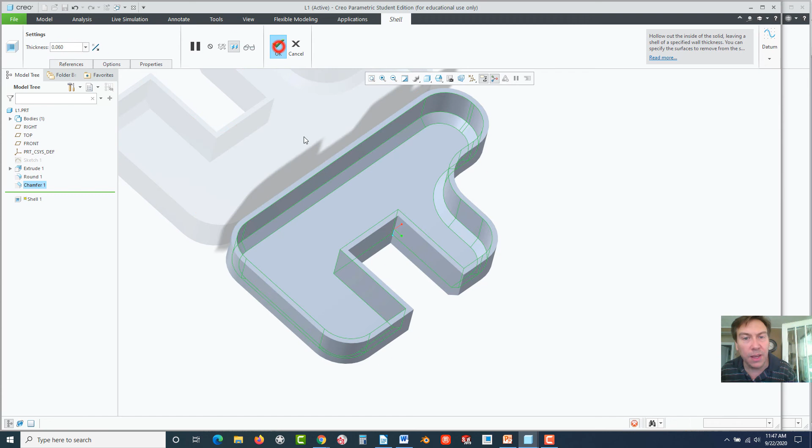Now try shelling if you want. Go to shell, select that face. Look at that, we have it set to 51 thousandths, but we could go to 0.06, which is more common. Hit enter.

Then you could add your colors to it. Remember over here, you could go to Applications, Render Studio, or if you just go to View. If you don't have the Render Studio, you could still use these colors under Appearances, and you can make it glass or whatever here. Like I'm going to go to Part, click on it, and there, now we have a cool looking part.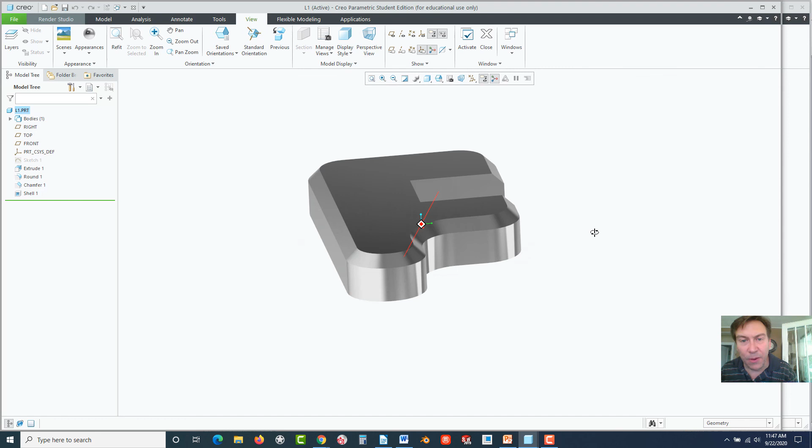Great portfolio piece, okay. All right, and then we take this one. I think that looks pretty good right there. Maybe change the perspective if you want, you don't have to. If you want, you could turn off the spin center, that will turn off where it rotates. It will now rotate off of edges and things instead, if you don't want that in the image.

And Alt, print screen. The reason I pick Alt print screen, holding the Alt key down, is if you have dual screens, it only takes the screen you're working on, so you don't have to trim as much. So over here, I'm going to click down here, Control V, and now we could crop that. So I go to Format, Crop.

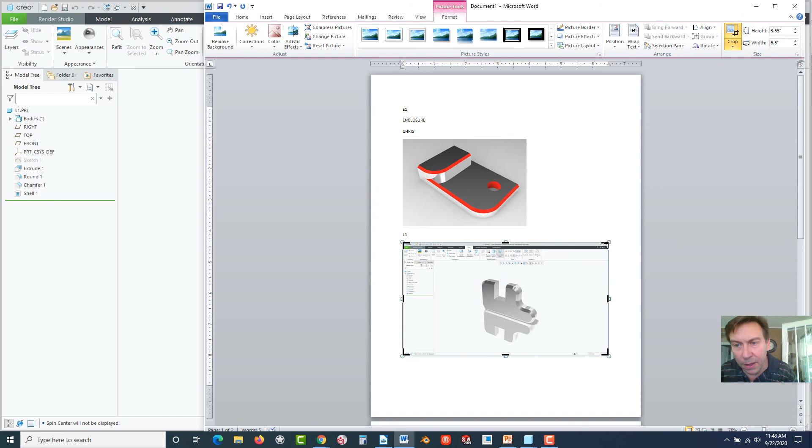Okay, so we're looking good. Let's bring that up, let's get the next one here. The next part will be L1B. Hit OK.

I'm going to, just for kicks, select the top plane and show you what happens. It's not a big deal. Select the top plane, go to Sketch, and remember I told you I was going to show you center rectangle. Love center rectangle. Okay, if anything is symmetric, use the center rectangle, it really works out well. Okay, click, drag it out, middle click.

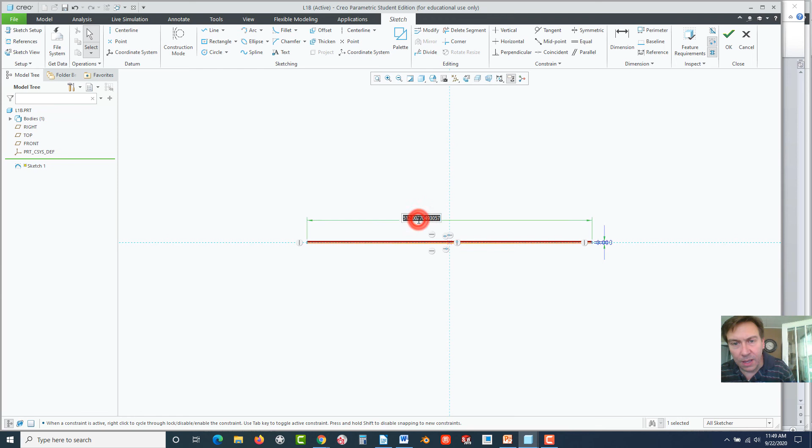This is supposed to be a lot smaller. Let's take a look what that size was in the book. And it should be right after, there it is. It's on page 25, Lab 1B, we see it's 3 by 5 and it's 1.5 inches thick. So we'll make it 3 by 5. Oops. Hit refit and squeeze this down. Let's bring that in a little bit.

There is a setting that does it automatically, and I'll try and find that and put it in one of the videos soon, so you don't always have to hit refit. Okay, now we're going to go ahead and draw in some center lines. Now center lines are needed. I'm showing you now what we normally cover in exercise 2, so this is a little preview for you. You don't need to do what I'm about to show you to do this, but we want those 4 holes in each corner.

Normally I would say just go ahead and draw them and dimension each one off the edges. It's good practice, and that is good practice. But I'm going to show you a little tidbit of advice here, something that makes it quicker.

Go to center line, select the origin, drag up a vertical center line, then select the origin and drag a horizontal one. You're probably saying there's already center lines there, but those are actually reference lines, not center lines. Reference lines can't be used for mirroring.

You have to actually draw center lines if you want to use the mirror tool, which I'm about to show you. Now go to the circle, and right about here, floating, stay away from that line, draw out a circle, click, make sure it doesn't touch anything. Middle click 2 times. Now drag these dimensions out just like we did before.

The hole diameter on the print says 0.5 and it says TYP. Anyone know what TYP means? It means typical, so for any hole that looks like it, unless marked differently, use that dimension. So 0.5, hit enter. And then this one, remember, center the dimensions so they look nice. It's going to be 0.75. Double click on that, 0.75.

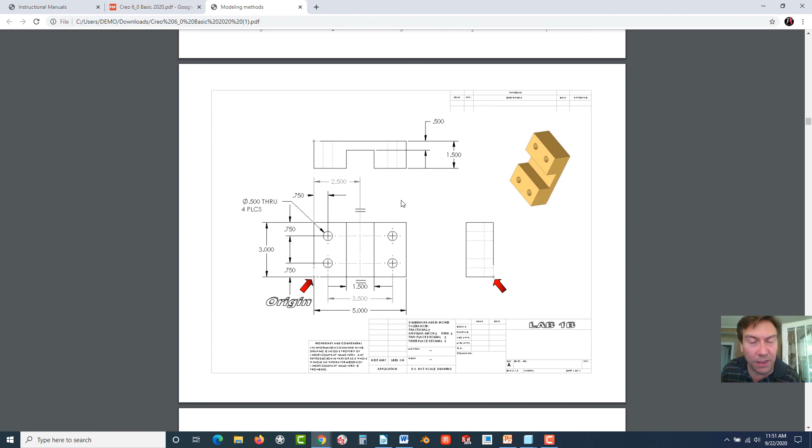Now you could go to the dimension tool and add that too. All right, let's verify that - always good to check. Oh yeah, hole is 0.5 through, 4 places. 4 PLCS means places, so there's 4 of those. And here we see 0.75 and 0.75. See that little equal symbol with the center line? That means it's going to be symmetric on the other side, so it matches.

All right, so we're good to go here. Let's get that centered there. Now I want to show you how to mirror. Middle click 2 times or hit escape. Now select what you want to mirror. Click on that circle, the outside of it. Now up here you'll see the mirror tool should be available. Click on it and select the center line you want to mirror across.

In this case, we'll mirror across the vertical center line first. Click on that and you'll see it mirror across. Now you can't do horizontal and vertical simultaneously, as far as I know. But let's go ahead and try this now.

Now I'm going to select this circle. Oops, notice that when I selected it, I dragged it out and made it a little bit bigger. Now you're probably thinking, wasn't that a strong dimension? How'd that happen? Yeah, sometimes that happens, so go ahead and click 0.5 to change it back.

Now, if that's a problem for you, if you can't let go of your mouse, like I made the mistake of holding onto it too long, you can always right-click and find a lock. By locking the dimension, it's not going to move if that ever happens to you. So now you've learned about lock, but you don't always have to lock your stuff. That was just a fluke, but it sometimes happens if you hold onto your pointer too long.

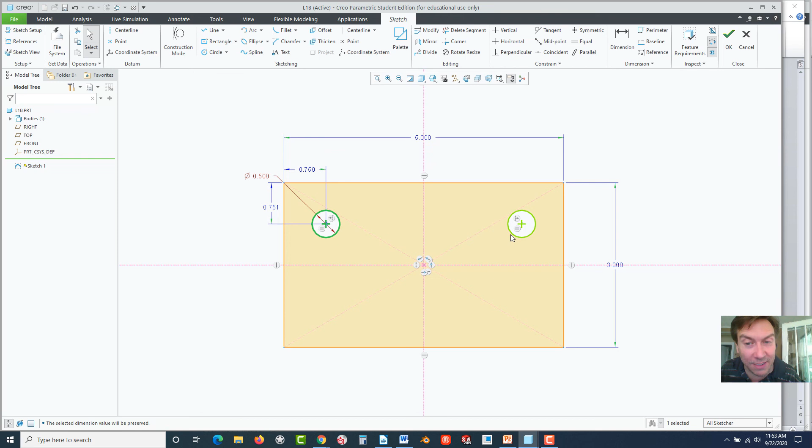Okay, so now I'm going to click on that right here. It highlights green. Hold Control - don't forget the Control key. Select this one here. Now go to Mirror and select the horizontal center line. Done. Oh, look at that, I messed up that one too. 0.75. Boy, I've never done that before by accident.

All right, now that we have that, we're going to hit OK, and go to Extrude and set it to 1.5, hit Enter, hit the green check. Now select this face, and I'm going to show you something new too. If you know you're going to extrude, select the Extrude tool first. You could do that. Go to Extrude, and it automatically starts a sketch on the surface, prepping you for what you're going to extrude.

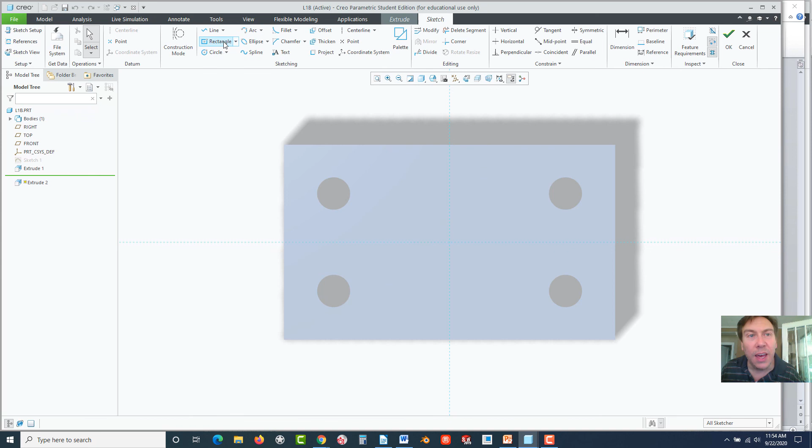Go to Rectangle, find the center point, click and drag out - we went with center rectangle on that one, sorry I went a little fast there. Get to this edge and let it snap to that edge, now middle click 2 times. This is going to be 1.5 for the width. Hit OK, and look at that, it went to extrude automatically, so there's a little fast way to do it.

Many CAD systems can do it that way too, but Pro Engineer Creo was originally designed to do it that way, and I'll show you a little difference in a second what it does. All right, so let's flip this because we know it has to cut, and it automatically needs to remove material. In this case we got that to work, but it only needs to go 1 inch deep. All right, and look at that.

It creates the crevice inside there. Hit OK. Now, why select sketch first and draw versus extrude first and then let it sketch? Well, look at when we did the first part, it keeps an extra feature on what they call the feature tree. Now, this is the history of everything you do. And every one of these little features takes a little bit more resources. A very minute amount, mind you.

But if you're doing an assembly of 10,000 to 1,000,000 parts, that increases exponentially if you sketch that way. So it can actually have a performance effect if you're opening up an assembly of 1,000,000 parts that were sketched first and then extruded later. By going with extrude, notice it negates that extra feature there. This extrude integrated it. That one did too, but we don't have that extra sketch feature.

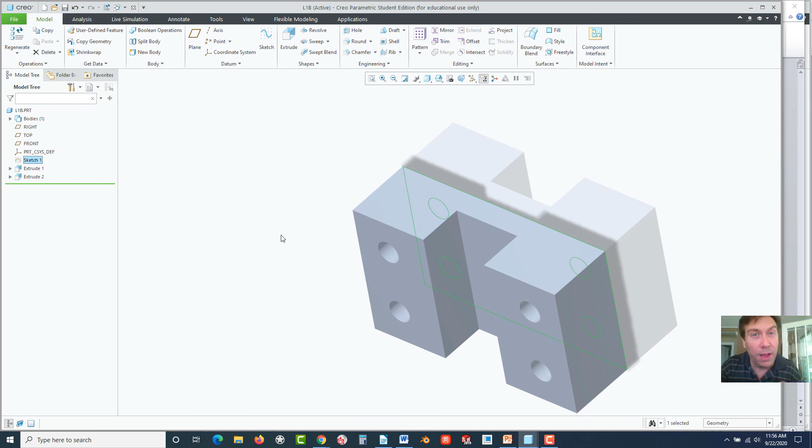But back when I used to use this in 1995, that extra feature could actually tack on, not kidding, 5 minutes of time because computers were so slow. Remember, a watch nowadays has more power computing-wise than a computer in those days.

All right, so anyhow, we've got that done. Now have a little fun with that. Let's go to round, select the edge here, grab that little thing out, have a little fun. Drag these out, rotate it around, get this edge. Okay, hit OK. Now go to chamfer, click on this edge here, this edge. If you want to make a countersink without using the hole wizard, which we're going to learn in exercise 4, you could put countersinks in this way. See the chamfer. Okay, hit it right.

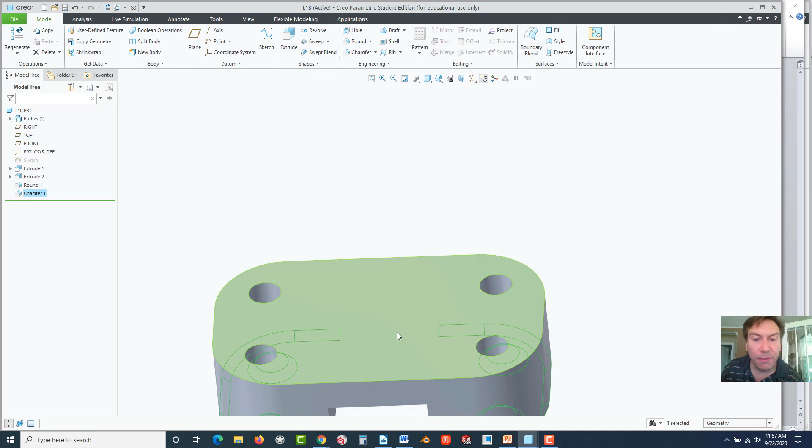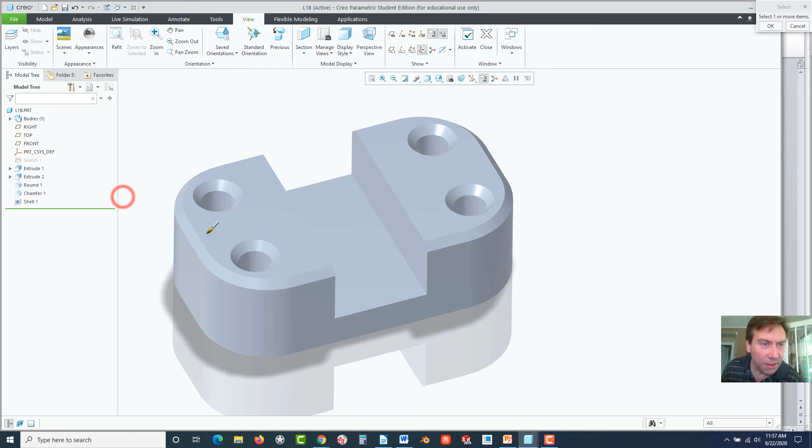So rotate it around, select the back side, go to shell, select that back surface, specify your wall thickness. We'll go 0.062 and enter. And you can do whatever you like. All right, and now if you want, you could go to view, go to appearances. I like the silver, but you could go with whatever you want. And go with part, select the part, and there it is.

You could add colors to it, have fun. Make it look professional. Don't make it look too colorful. Sometimes it might not look right, but have fun with it. I encourage you to have a little bit of fun. And remember, go to perspective.

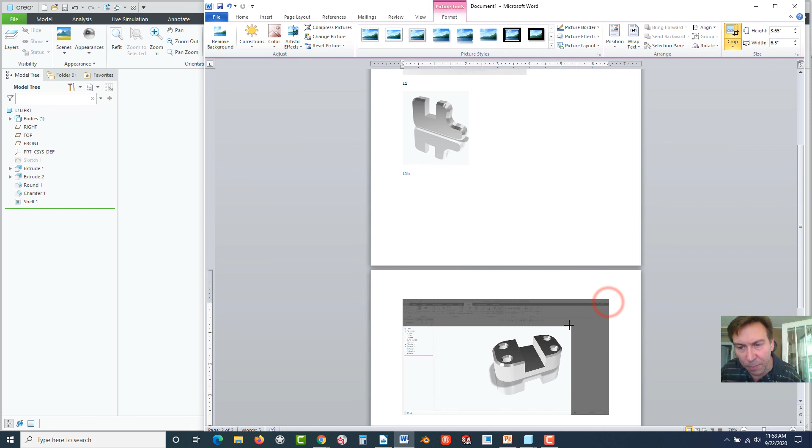Now we'll take that part, Alt, print screen on the keyboard, go to our document here, click underneath L1B, Control V. Now it might go down on the bottom sheet, but that's fine. Go to crop. Oops, I didn't want to scale it. Make sure you grab the crop tool, which is that little L there. Click. See if we could get it up there. Oh, it doesn't fit. Let's squeeze this one down.

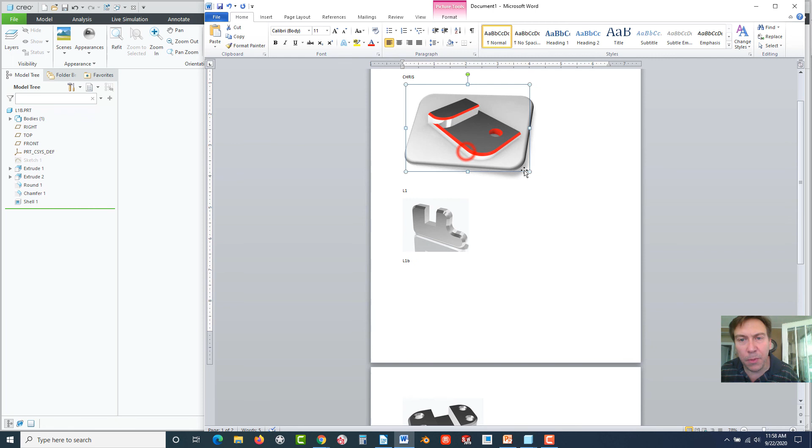I'm going to go to Format. I'm going to crop off the shadow a little bit here. There, now we're able to fit it. Get that underneath. And there you are. And that's all what you can do. And if you want to dress it up more, under Format here, there's frames that you could add. You could put them in circular frames or make them look like photographs. You can have some fun with this, okay? And just remember, they take up a little bit more space, so you might have to squeeze them down a little bit.

Now, when you're done with this, you could go to File, Save As, and save it as a Word document. And you could call it Portfolio. Put your name on it, maybe. And you could save it as a PDF too. And that's how I want it. I want them saved as PDF and sent to me. And then I give you your grade. And you'll see it on D2L.

All right, and you could keep using this document. So what you do after this, you hit Enter, and then you could go to Insert, Page Break, and now start capital E2 for exercise 2. And that's going to be a wheel. And that's what we're going to cover for the next exercise. All right, so that concludes what our plan was to cover today.